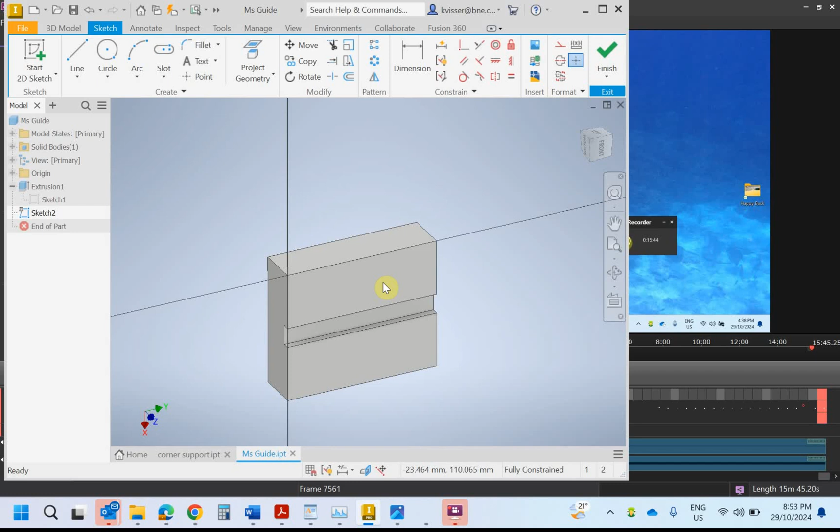I'll just finish this sketch here and show you how I arrived at where I was just then. I'm basically taking a side view of this item and extruding it.

So I've just drawn up that simple rectangle there with the 20 by 7 groove taken out of it, and I've extruded at 156. So with that, finish my sketch, and that's my 156.

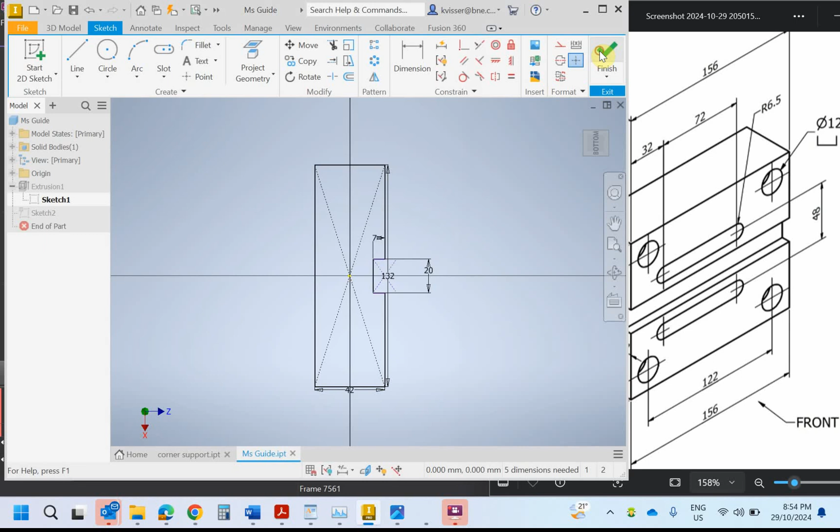And then I've started a new sketch on this surface here. One thing I wanted to show a bit more that I didn't in the last video was - and to be honest it's because I don't really use it that often, but now that I know more about it I probably will - doing these elongated holes, or slots.

So this one here, we've got a radius of 6.5, so 13 mil across and 72 mil there. When you go to slot, there's 3 different ways you can do it, and then you can also do curved slots.

I don't think it really matters which one you use, and you can also go overboard trying to get all the information, putting it in correctly into here.

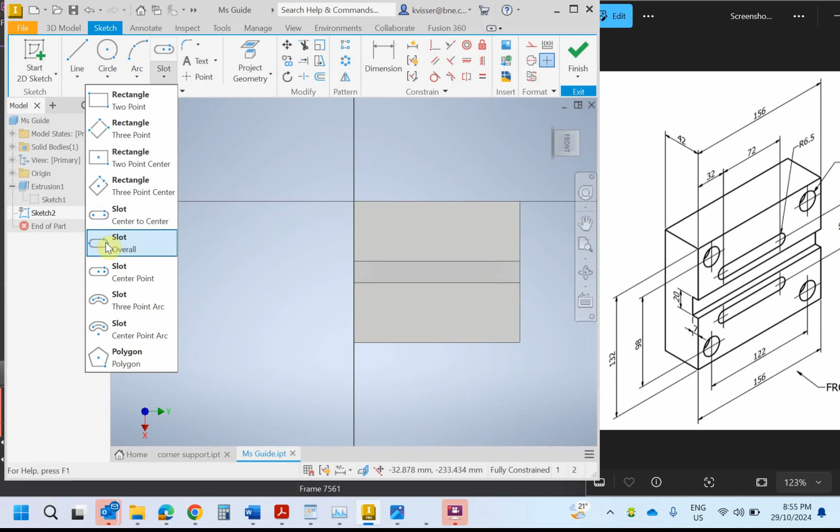So what I'm going to do is I might even just go center to center here for a start, and I'm going to dimension it and locate it later. So if I just go boom there and drag that out.

What I'm going to do is I'm just going to go to dimension. If I go okay, cool, well that's going to be 13. And I also know that from dot to dot, so center point of those circles, I know that's 72.

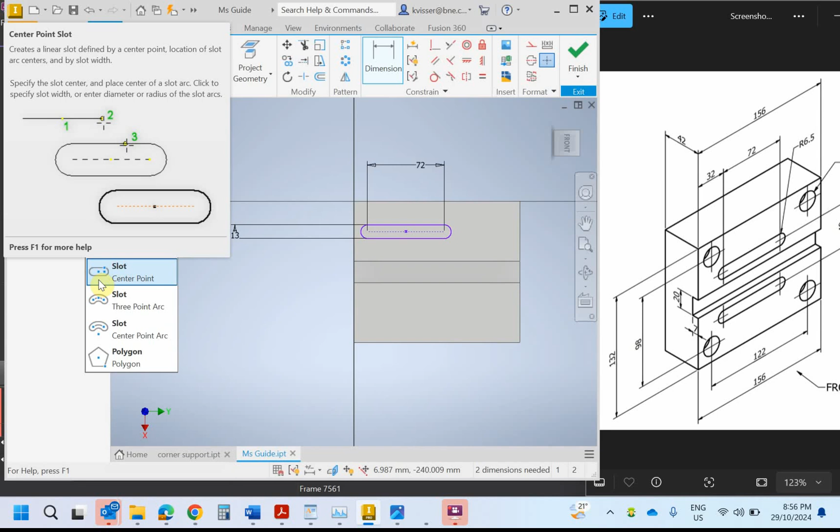What I found is you can just spend a heap of time reading into this, as to what dimension you put in first, and selecting an area, and all the rest of it. It's easier just to draw, for me, it's easier just to draw a slot.

Excuse me, it's got a video uploading at the same time. It's not fun. Try to get this back on.

Easier just to draw a slot roughly the size and then come back and dimension it later. So I know from there to there it's supposed to be 32.

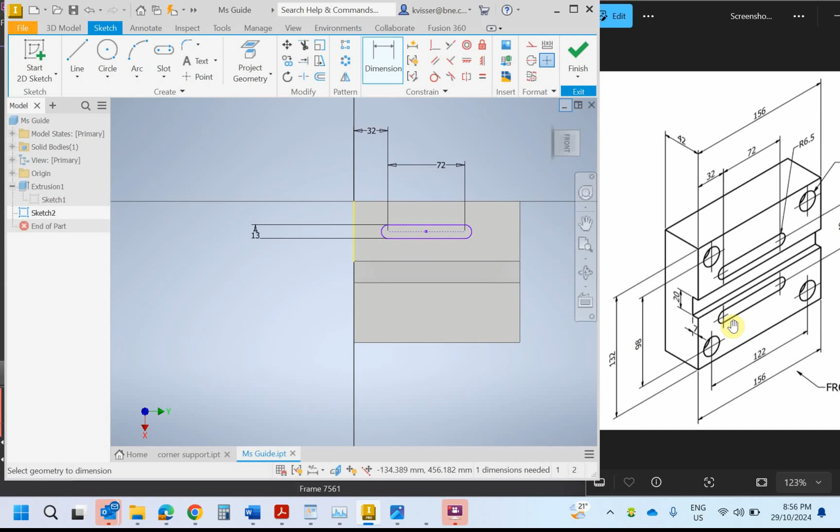Okay, and then we take a look at this. We've got 48 mil in between the two of them.

So then if you took the overall, which is 132, you subtract your 48, that gets you 84. Divide that by 2, that will get you 42. So there's 42 mil between that line and that edge, and same again down the bottom.

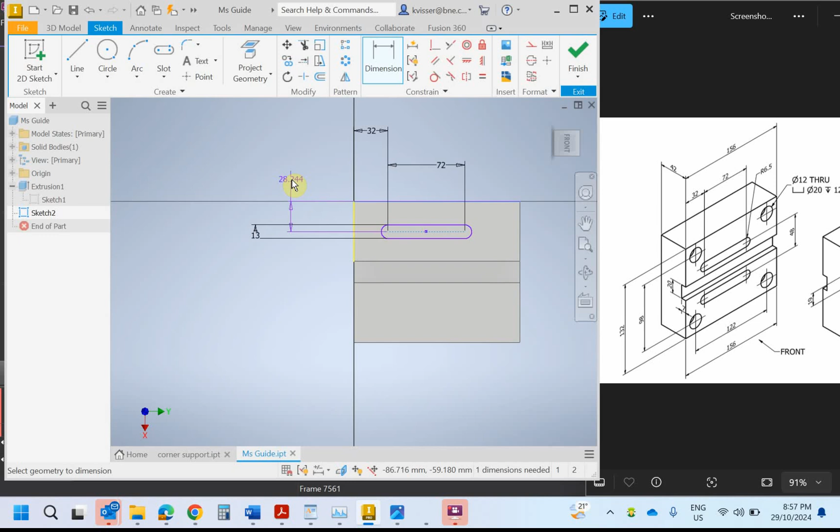So dimension from there to there, and we'll throw that one in, and that's going to be 42 if I'm correct.

There's another one below it, so an easy way to do there would be to go to copy, which I had just before.

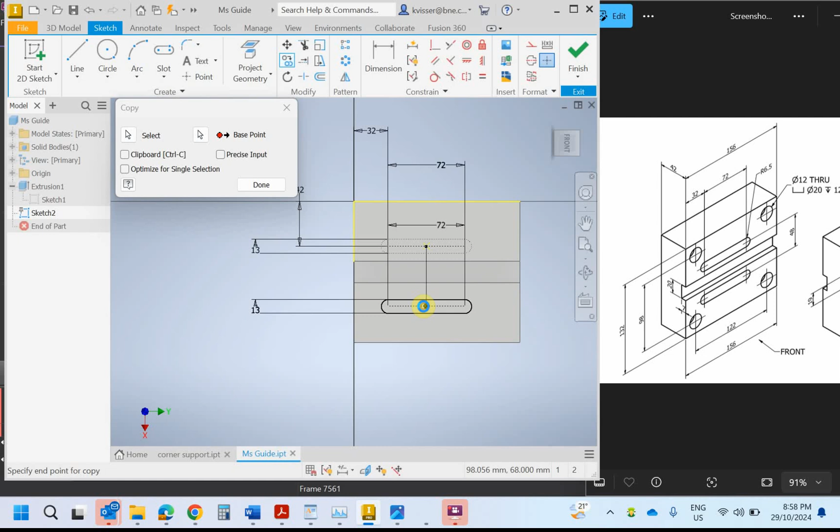There it is, okay, and I'm going to select what I want to copy. It's now blue. My base point will be here. I'm going to turn that off, and I've got that coming down now, with that line snapping so that it's coming down nice and straight. I'm then just going to click on done.

I'll then dimension and constrain it after I place it. I'm finding that a bit quicker as well.

So something's going on here with my mathematics, because... oh no, it's just the way that I dimensioned it. I'm going to delete that dimension. I didn't do the center line, I did that one there.

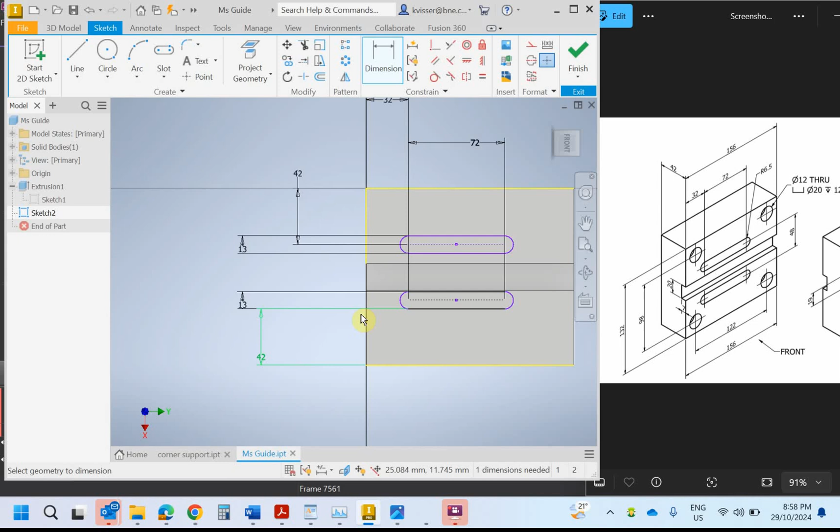Escape twice, now I'll be able to delete it. Grab that center line, that line there. That should be 42, and it should be looking a lot better now.

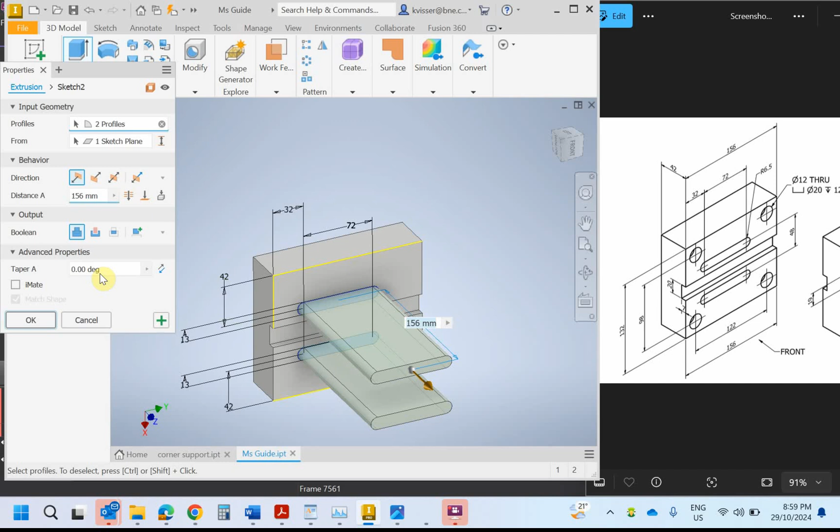Finishing that sketch up, I'm going to extrude. It's not picking up the profiles, so I'll select them and say cut, through all. So I've got that there.

Now when it comes time to do your holes, this one here should be pretty straightforward. If you take a look at the drawing, that's the back side of it. Straight away you should notice they're not the same size.

But then if you take a look here, what they're saying is, excuse me, that's my screen kicking me off, that there's a 12mm diameter through the whole way, so through. That means 12mm, that would be that one you're seeing there, through the whole thing.

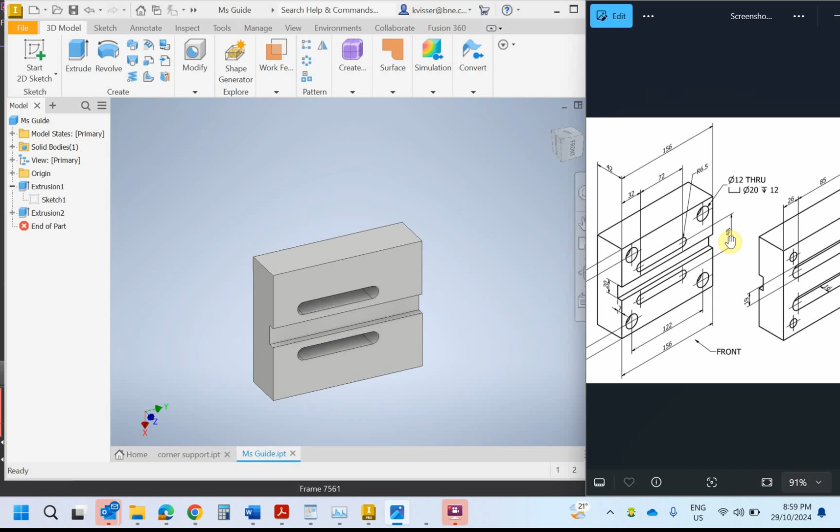And then the bigger one here is 20mm diameter, and it's going to go in 12mm deep, which is what that's symbolizing there. So let's see how we can do that relatively easily.

If I select that face and do a new sketch, I'm going to place a point. Now my point will be there, and I'm going to go dimension.

And if we take a look here, how can we figure out? So you've got 132 and then 98, so you've got a difference of 34.

And then divide that by 2, and you'll get your 17. So it's 17mm from the outside edge to there.

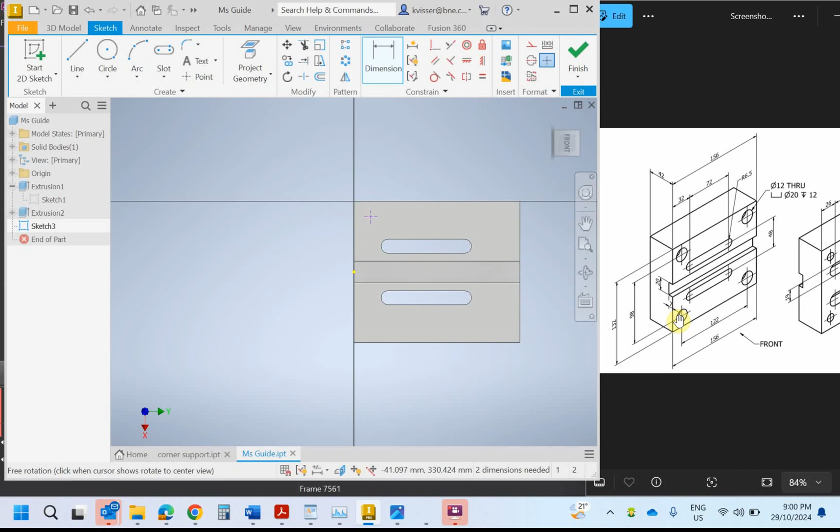And then we'll do the same again here. So dimension, 17.

156 minus 122 — forgive me guys, I'm not super quick at the moment — so what's that, 34. That would be 34 divided by 2, so it's the same again, 17 by 17.

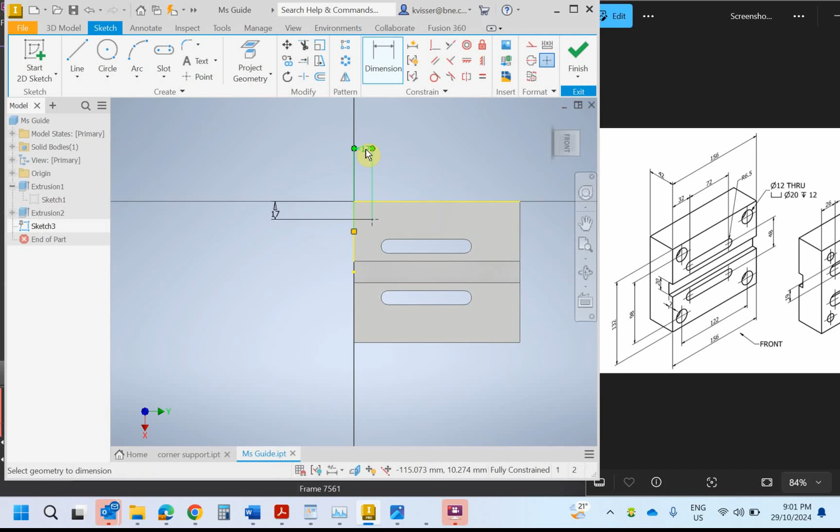You would then go around and you'd place, and you'd be able to do them all at the same time. You'd place a point there, there, and there, and you could work that out.

Another thing that would make this even quicker would be if you went projected geometry, you place these lines. You could probably also do an offset. So if we went offset,

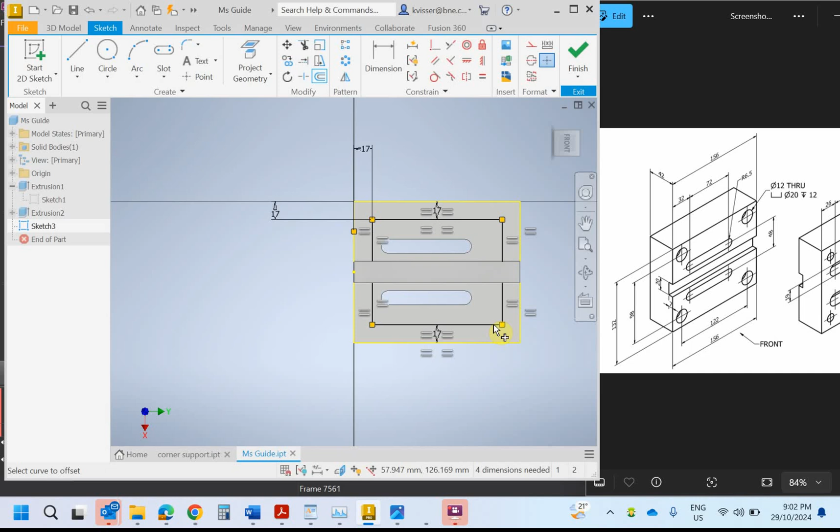I bring that in 17, that would give me 2 points. And then if I did that and bring that in 17, that would be an easy way to do it. Not sure if I need to put a point there or not. I'm going to finish the sketch and see how we go.

And the command that I want to use now is hole. I can just select there, which is pretty cool. And this looks like the hole I want to do, I think.

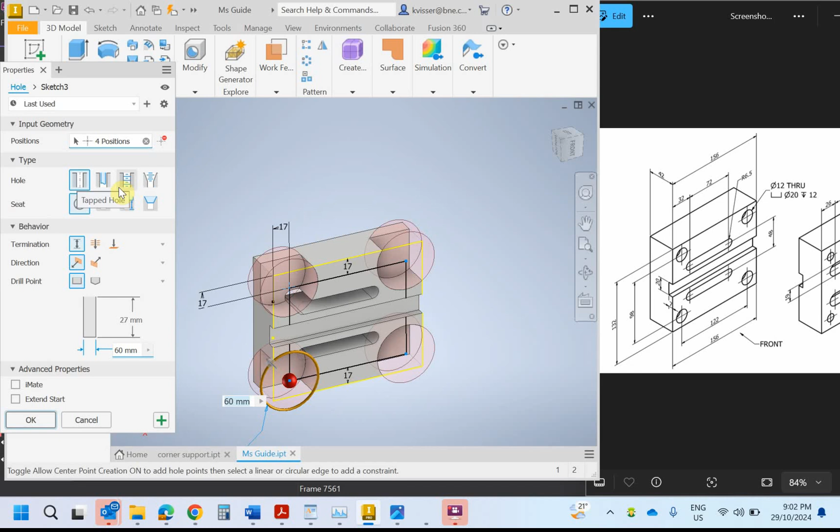Have a go, let's see if we've got counter bore. It's now going to draw a little picture for us, and I'm a bit worried that I've only got one little demo there, but we'll see what happens.

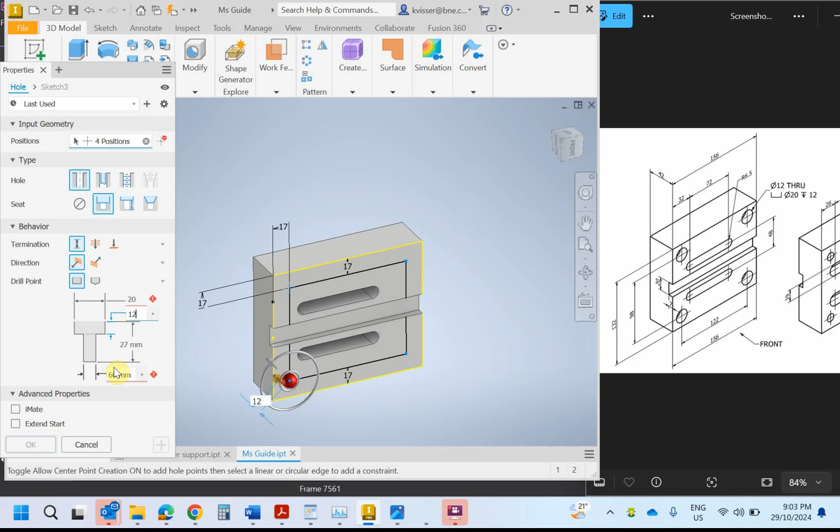So on our outside, we're going to want that 20mm, and we're going to want it to come in by 12, and then — I might have selected the wrong one here.

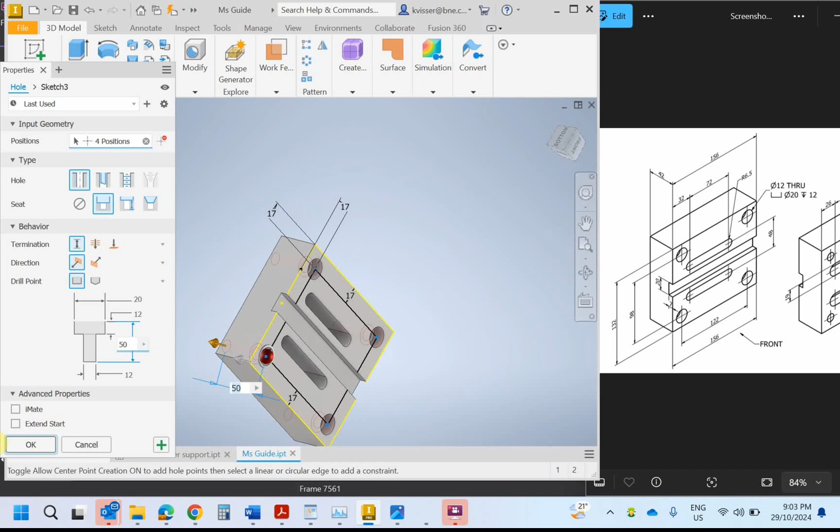So 12mm there, then if we just make that 50, it's definitely going to go through. I think I've done it there, that's great, cool. And we'll click OK.

And the beauty of doing that for your holes is that you can come back and say, actually, I cooked it, that's not the size at all, and you can go back and change it. I think I've got that right.

I always do get a little bit confused looking at these drawings as to which one I do need. But once you click on them, it gives you a bit of a picture as to what it's going to do, and that's always my point of clarity there.

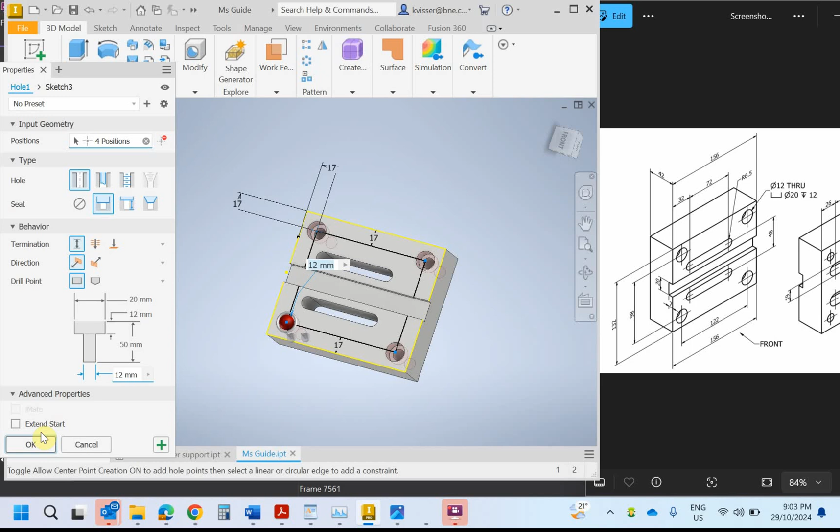So that's I think that part done. I believe so. Let's have a look. Yep, nothing else to be done on that. So hopefully that helps.